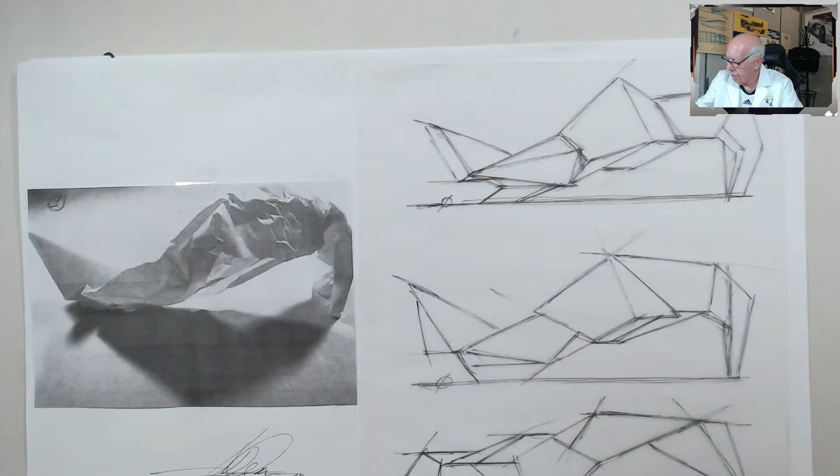So you can see it, Terrace, it was in that mode right there. That's how it sat. Okay, now let's put that aside for a moment and get these out of the way.

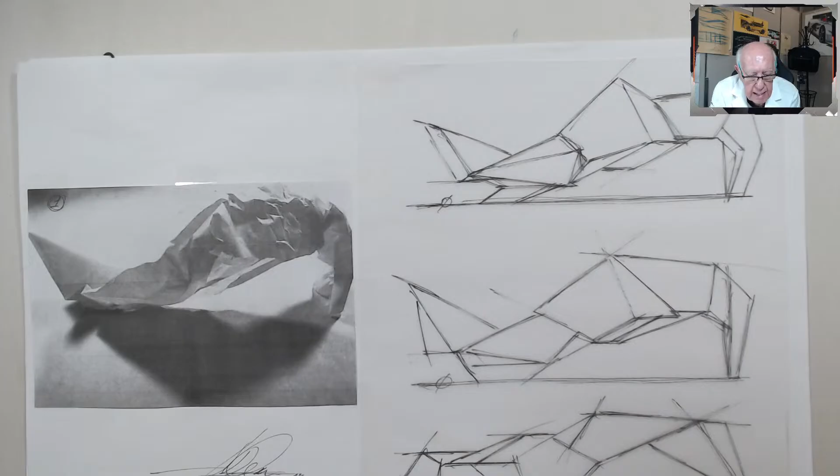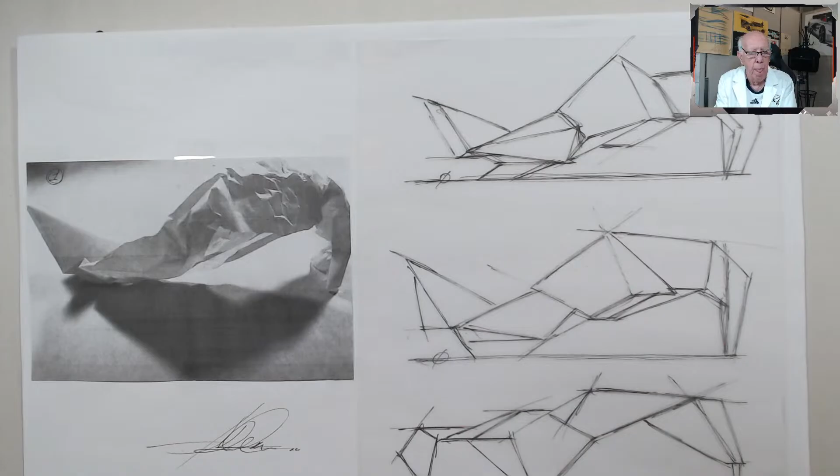Yes, it is, it's a whole different approach to it. Honestly, Terrace, the real direct answer is it's different because now it's more sculptural, it's in the third dimension now. You begin to see things that cause us to make decisions different than doing an empathy sketch. Empathy sketch is very much a flat approach, there's measure to it, but it doesn't have the same overall impact that a sculpture does. That third dimension gives you the idea of saying, oh, could it be? What if? And so forth. So it changes its character all the way through here.

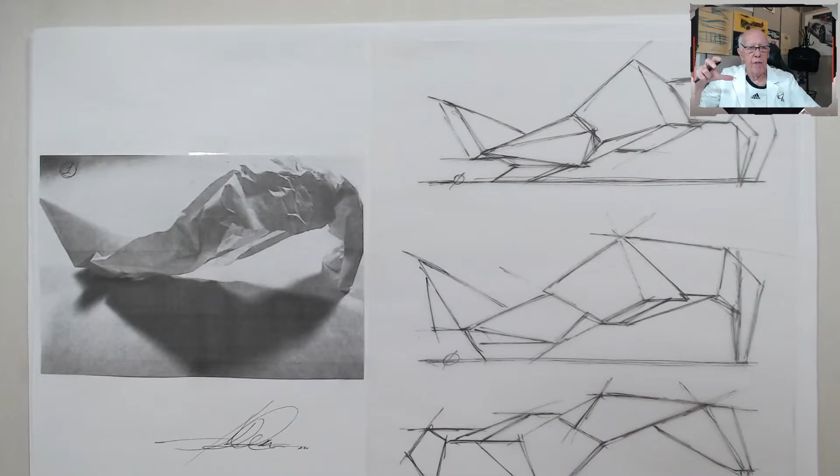So I hope that answers your question, is that a good way to answer it, hopefully? It does offer a much different approach because it's still abstract shapes, but it's in that third dimension that causes us to see surface instantly, and we can make decisions on that. So I'm going to stop for a moment. What do you think, does that help answer your question?

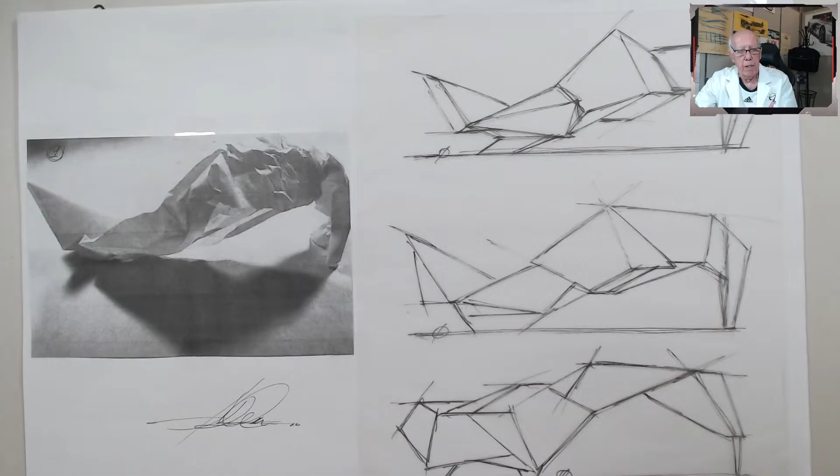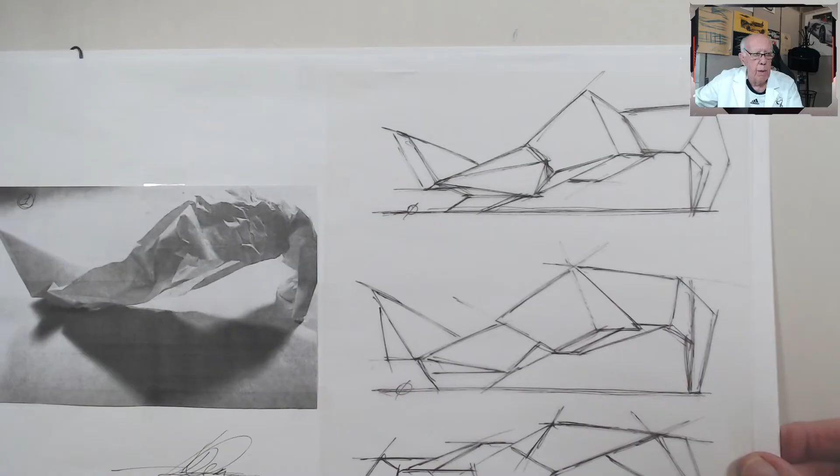Let me stop here and just make sure we don't go too quickly with this guy. Now I just took each one of these and went through it. For example, I photographed each one of these paper sculptures or empathy pieces that I did, and I'm going to attempt to describe to you exactly how this works. So there's the first one we just showed you, that's number one. What I did was break it down, and I want to be very careful not to just illusion you. This is a very sculptural piece, obviously.

Very round in some areas here. We notice that radius in here, and that strong pediment of that foot into a long promenade area here, breaking it down. But what I did was, in each one you'll see here, I broke them down into what the planes are doing. For example, what is this guy doing here? So these are very stealth-like or very sheer, but I'm not saying these are the end final product. I'm just breaking it down into shapes that I see inside this form.

For example, the foot. Could that be an entry area, into a promenade or a gallery area, and into another additional building here, or a footprint set? Maybe it floats. So those are the things I'm making certain of. Now, as we go through each one of these guys.

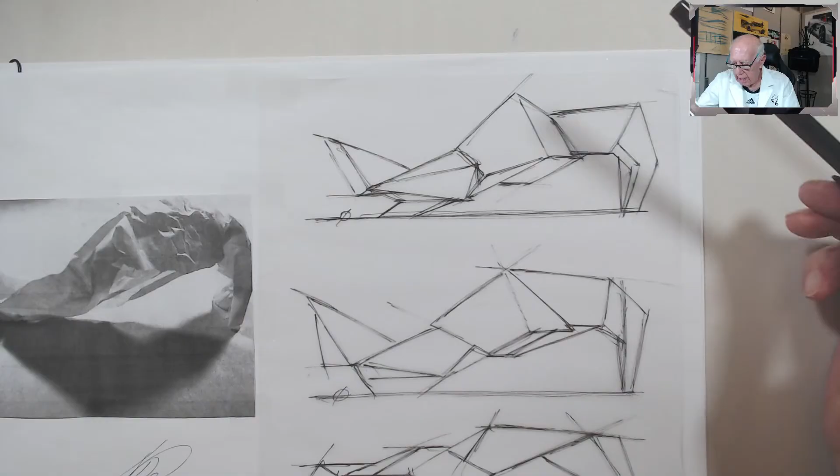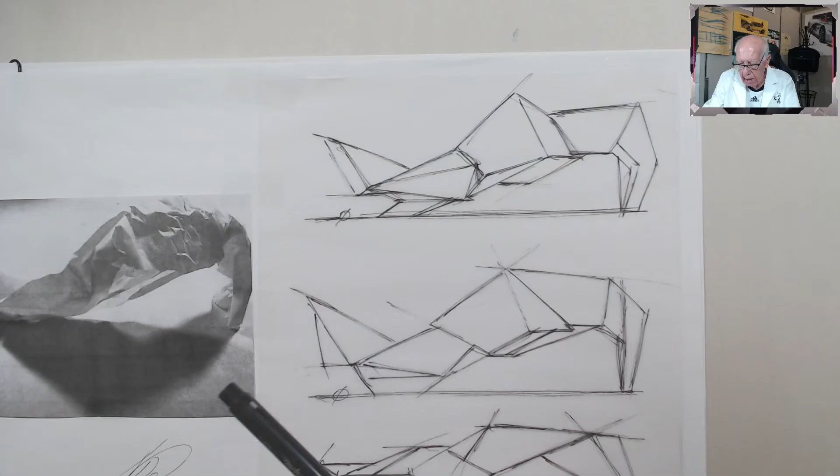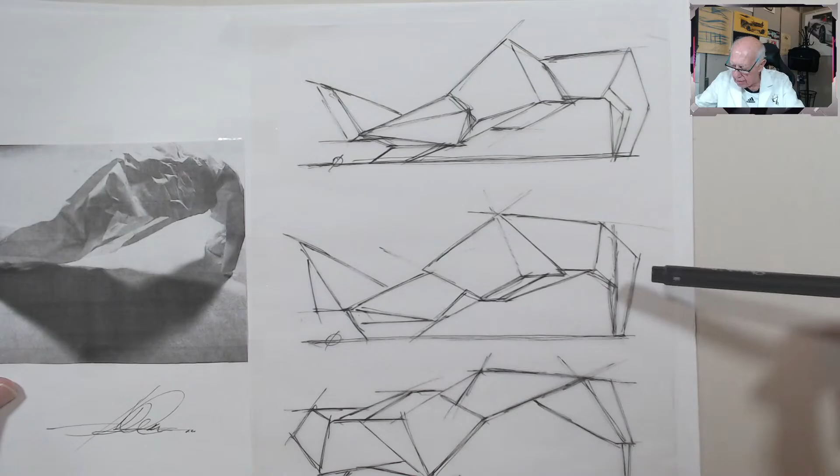Then the last one, I just inverted it, turned it around, flipped the thing upside down. Look at the circumstances that change here. All of a sudden, there's a lot of character in these things. And again, we'll be very careful to stress the fact that we're not looking at something that's stealth-like. This is nothing more than breaking the planes down for the benefit of beginning to massage them and change them as we go through the process from one to the other.

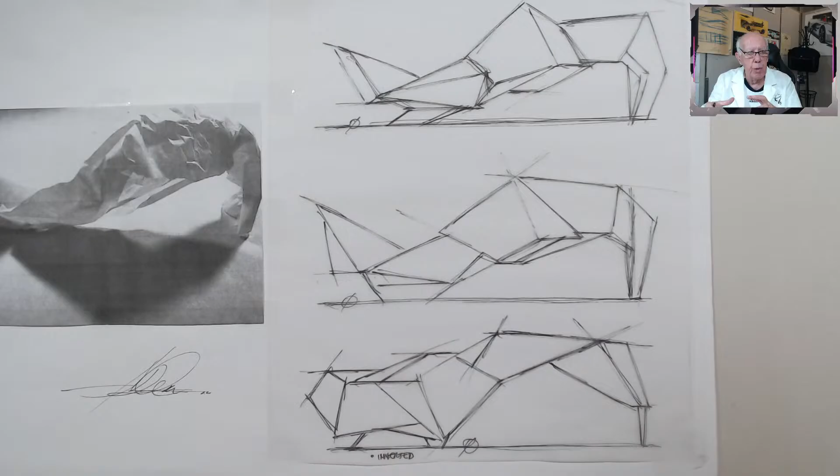So this is number one, a very interesting set of circumstances. And we'll show you later on today how we took some of these pieces and began to embellish and take advantage of that concept we're just talking about here. So this is number one. I'm running out of space here. Let's do this, I'll just stack these up. There's one. Now the second one I did was this one.

This is the same set of circumstances. I took a photograph. This is number two. Where was I here? Yeah, this is number two. There it is, and there it is in plan. Let me get this out of the way here. There it is in plan view, but there it is in side view. Notice how when you put that down in side view, there's a very large, very strong operation here in terms of that radius of that fillet into another floater behind it all.

So if you look at these sketches that I did in translation, there it is as I'd seen it. And this is what it looked like from a direct elevation. Notice this form right here is very strong. And again, this little cantilever over the top of that. Then this little appendage out front. So I condensed that by looking at this shape, that area there.

This portion right here became that portion right there. Then we dropped that in over the top of that shape, took this shelf right here and added that onto it, and then extended that portion out in here. And then putting a footprint on it, and again, it still had that same little shape in through here, a little shadow area.

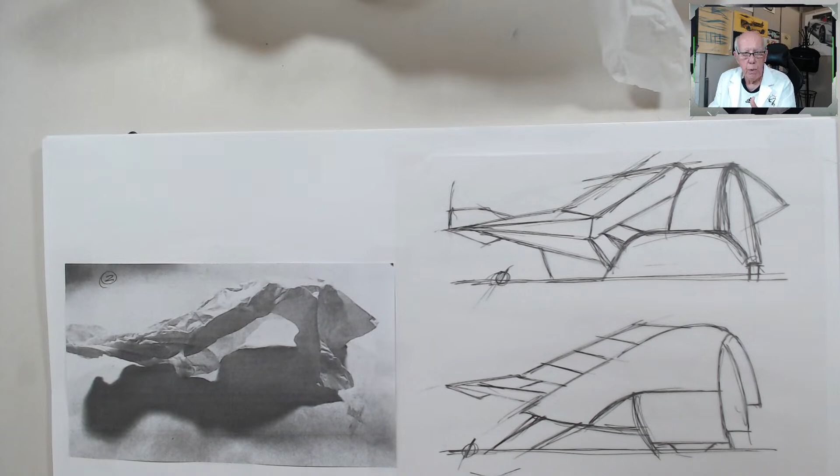So, next. Second one, look, I took advantage of this second sketch. There's that parabolic curve right there, and I brought that all together. This shape comes off of that form right there, right through that whole shape. Then we added this little plate down below here, which is this extra section through into here. That kind of eliminated that cover altogether. Didn't need that. Then I came back again with this whole tier up on top and put a little ladder to it, and then extended that tail out with a little piece of embellishment here.

The last one again was turning it upside down, where I took that same shape and flipped it and got the parabolic curve to go upside down and change some of the character. If I do it here upside down, all of a sudden everything changed dramatically. Just incredible how that whole thing put together. There's a lot of in and out on this stuff here, but this inversion gave me that whole portion upside down. It gave me this portion here, up, and then again, simplified the shapes and forms. Each one of these shapes, some are round, but most of it was very sheer, very stiff.

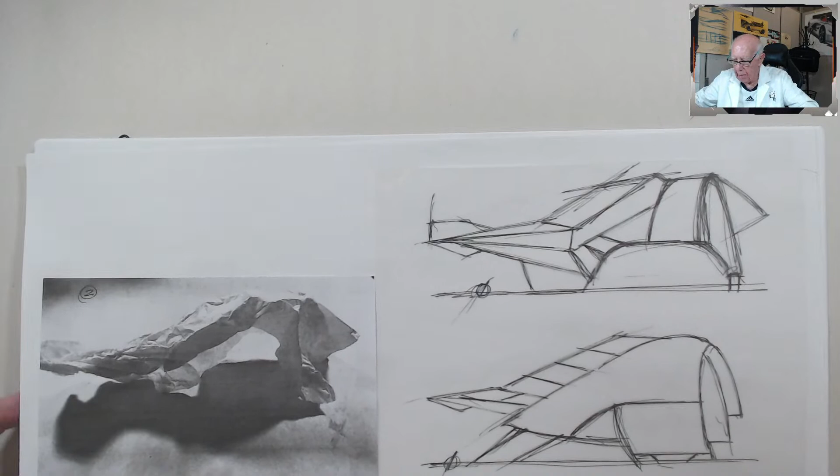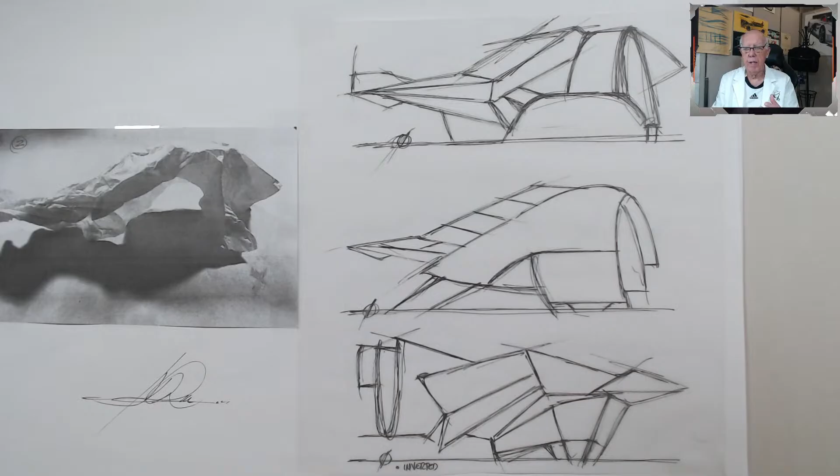But the idea behind it all is coming back in and saying, all right, now we can take that same set of circumstances, those basic themes, and begin to massage them and do a little bit more uniqueness with them. Maybe soften some things up. And hopefully by the end of the day today, we'll have a chance to have you all take a look at these sketches and say, okay, we kind of prefer this, or that. I'm not really going to make a selection in terms of my favorites. I'd rather have audience participation and say, this is interesting, these are pretty unique, this I would not do, that I would do.

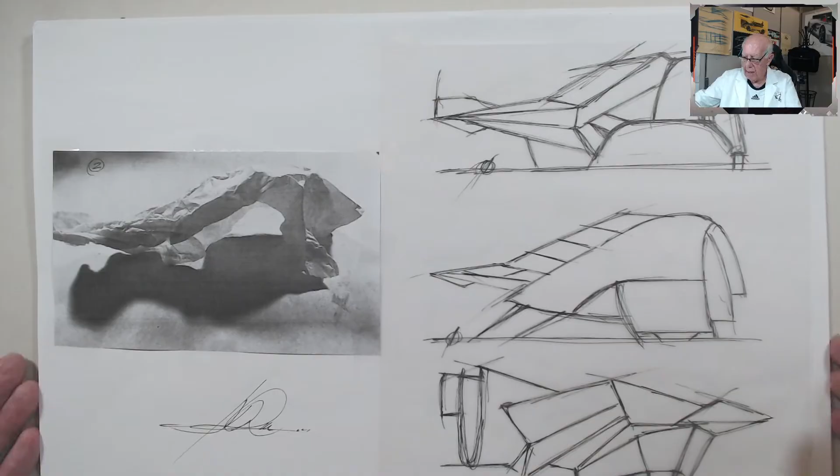The idea is to make this into a process where the next 3 or 4 sessions we take this thing and develop it further into a nice set of final architectural sketches, thumbnail sketches, and then some color studies and perspective. So that was element number 2. Let me get this out of the way and I'll move along quickly. Now the third one was this guy. And then the third piece was here.

Notice here it is in photograph. Look at the shapes that are generating here. You've got this form into that little curved form, and then into this whole barrier piece out front, and then again floating into a drop and into a shape. Notice now the sketches. That shape right there became part of that form there. Different way of looking at it, and coming out of that with this wedge or triangle out of that area. And that little extension down below, dropping it and putting that foot together with it. The original sculpture gives you the raw forms and you can interpret the surface character. Yeah, that's great. Well said.

By the way, am I explaining this stuff okay and not mystifying it or making it difficult to comprehend? The whole key to this first presentation in the project today is to take that abstract sculpture to the third dimension in architecture, break it down into shapes or faceted planes, and then slowly massage that into a series of development sketches that turn into, hopefully, a neat architectural study piece. So, does that make sense? Let me know if I'm making this clear. I don't want to confuse anybody. I want to keep it as simple as I possibly can, and it's an extremely direct approach to problem solving, and it opens up.

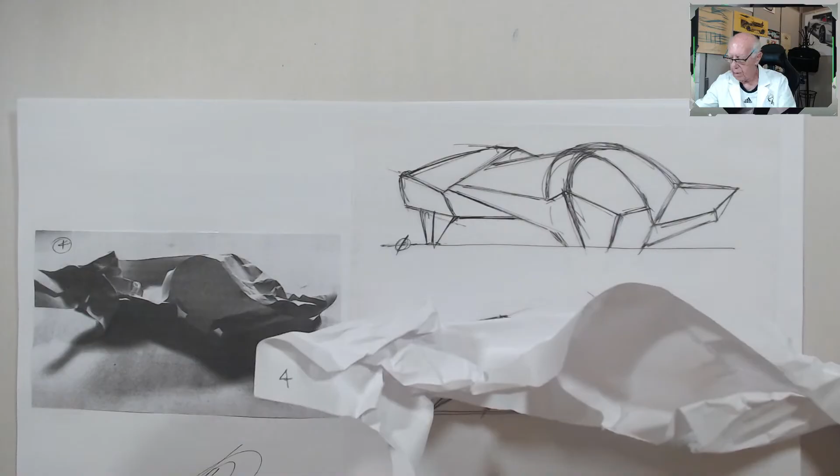Let me put this over the way here. That's element number 3. Let me get these out of the way. Put this over here. And now, this is number 4. Number 4 is this guy right here. Interesting how this one, all of a sudden, there it is in plan view. But again, look at the side view in this thing. And there's a photograph here. Look at that shape, that form right there becomes that form right there.

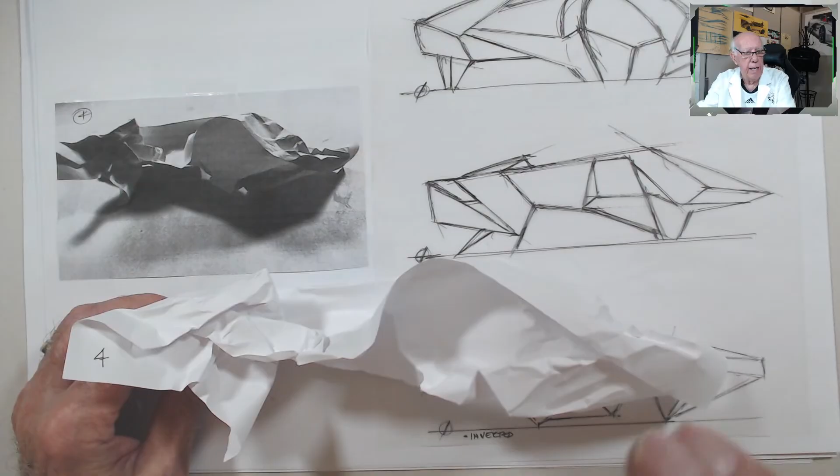Let me just move that over just a bit, then move this up and out of the way. There it is right there. So there's the elevation we're looking at in terms of what I did from that strike. This one, from there to there. And then again, taking advantage of that strike by going back in and saying, all right, let's do this. Here's number 1. Let's move this out of the way. Pardon me, thank you. Get these straightened up. There's number 1.

I'm not stating here by any means that all these are favorites. These are just interpretations. And my task now, working with you from week to week here, is to break it all down and find a series of selections that really begin to hum in terms of making a real good, strong statement here.

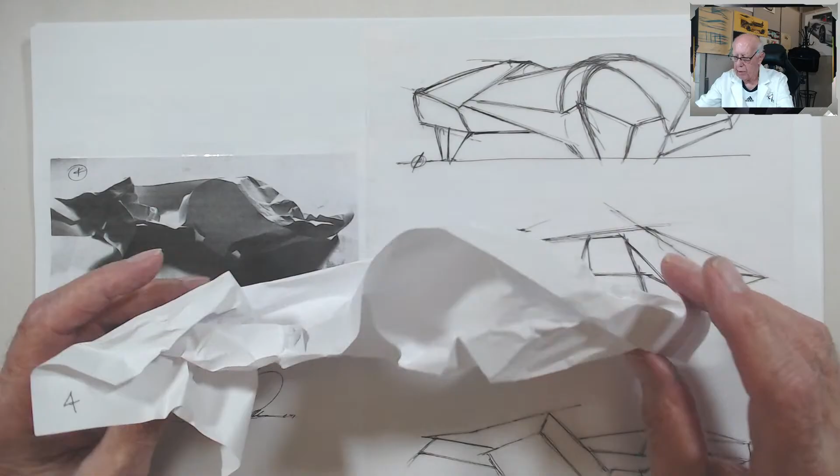When you inverted it, all of a sudden the whole thing changed. Instead of having this approach to it, for example, where we saw it like that, by turning it upside down and looking at it like that, all of a sudden things really change. Now I could go back in and, for example, look at this form here — let me put this out of the way here. This could go softer, but again, the idea of having these 2 modules connected with a sky bridge of some sort was, to me, pretty intriguing.

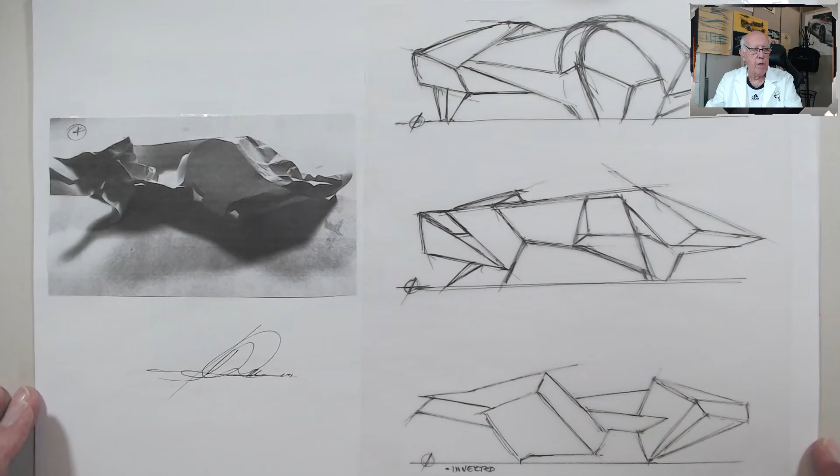So let me stop right there for a second, Antares. I really need your help. How are we doing here? Am I hopefully keeping this pretty compact in terms of understanding? Again, initial sculpture, translation. Not necessarily sheer, not necessarily all just stealth, but again, breaking it down into planes to begin to utilize as a sense of series to develop the shapes and surfaces in a final architectural piece.

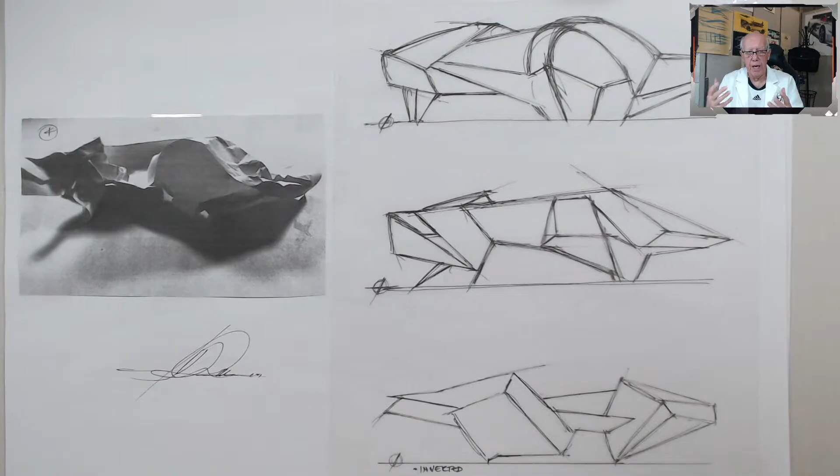Let me stop right here for a moment and just give you guys a break to kind of tune in and say, yeah, you're doing okay, or else shut up, or you're going too fast here. So I don't want to speed it up here, but again, very intriguing set of circumstances to work with. I've used it over the years. I'm always a big fan of it, especially in architecture. The Frank Gehry experience is one thing. The interesting thing is how it all comes together in terms of creating newness without us forcing it.

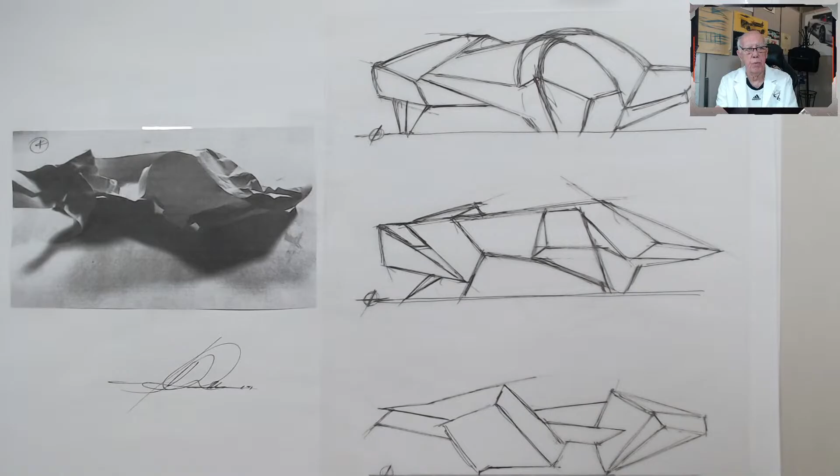How many of you, let me just stop for a moment here. How many of you, and I'm guilty of this, find yourselves doing the same thing over and over again? You've got favorite shapes, favorite forms, favorite views. That's all fine. But when it comes to developing a real target with your client base, it's always good to have a newness about yourself so they can't second guess you or predict where you're going to go. This tool, along with empathy and the flat dimensions with the content creator, are phenomenal. I mean, it just changes everything.

So I'm really intrigued by the fact that we're doing this project. And we're going to finalize some pretty cool stuff. When we're all said and done, maybe 3 or 4 weeks out, we'll go back and see the final piece and bring it back to the one we selected and the empathy architectural 3rd dimension. Really cool stuff. So here's number 4, and here's number 4 again. That was it, looking at all 3 variations.

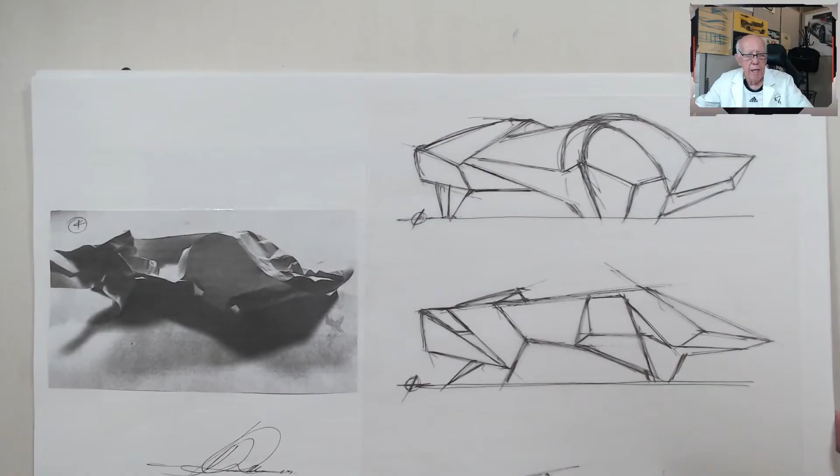Again, breaking shape down, that surface to that surface. And again, getting a little sheerer with it. It took that same form, and then just faceted it. And it's there, and there. There, and there. Just making changes to see things go here. So, yeah, that is pretty cool, isn't it, Antares? I mean, it takes a lot of the pressure off of us about trying to find something really different and unique. Let the paper do the work for us, and then make the decisions in that sculpture to make it become transferable. So there we go.

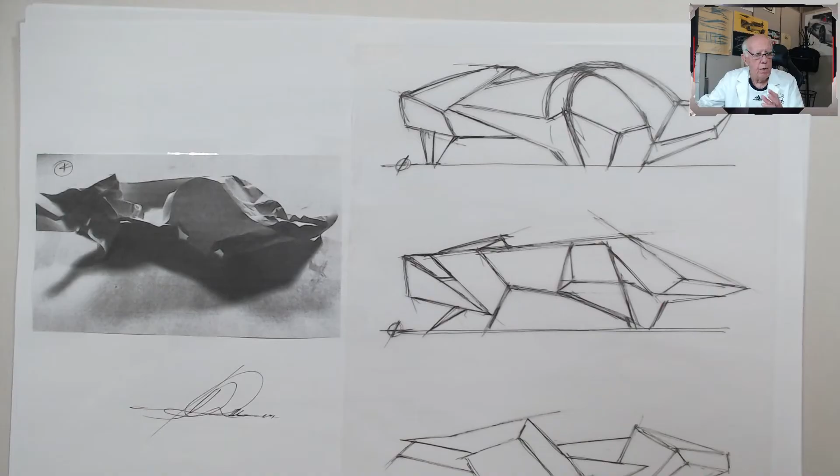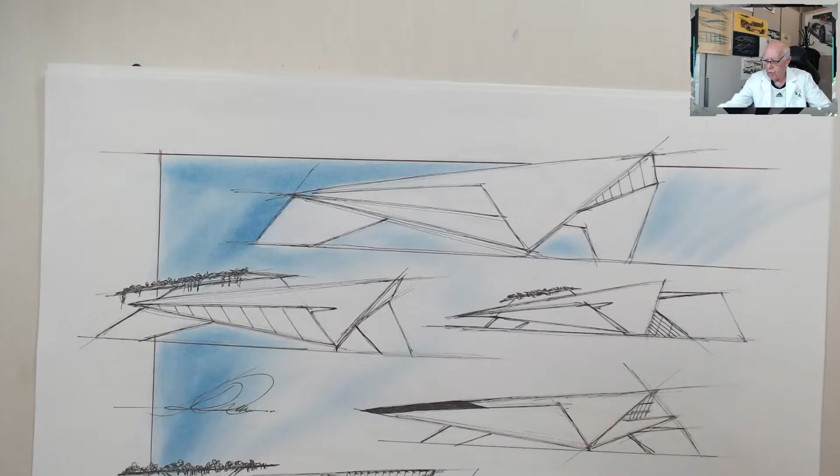I took a piece of sculpture of paper here, and then this is number 6. There it is in the plan view. Let me just lay that out here for a second. There it is in the plan view. But then when you turn it sideways, look what begins to happen here. Let's get this guy to kind of operate. There it is. When you look at it from the side view, look what this guy starts to do.

There it is. Let me bring it down in scale here. Look at that. Look at that elevation. In an elevation, we're looking at the very strong triangle up on top, this wedge on the side here, and this very vertical tail form over here. This addition. But again, I took this again just using paper, and in this case using folds.

And what I came up with was this. I mean, that's what it looked like. Now in the plan view, I didn't get to the plan view yet. I'm just looking at elevations. So there it is, for example. Let me get this out of the way here, and we'll just make sure there's some real estate to work

with here. So, based on that shot right there that we just looked at, this supposed elevation, that piece right there, I went ahead and said, okay, why don't I translate that into some sort of a third-dimensional piece, an architectural piece. So I'm going to throw a series of sketches. Here's what I refer to, studies on number 6. This is sculpture number 6.

Again, notice, very strong line here, and then what I did was this. I started here with this. Let me show you another again. Another elevation. This is where I started right here. Again, so I get this. That's it right there. So once I started here, there was number 1, so to speak, in terms of what that shape was doing. And so I took that form and said, all right, what if I did this?

Really not saying design at all. It's just letting the paper design it for me. Does that help to answer your question before I go any further here? Hopefully that's clarifying it for you a little bit. Good. So these are the sketches based on that number 6, where I just kind of flipped it around a little bit and did some really interesting things here.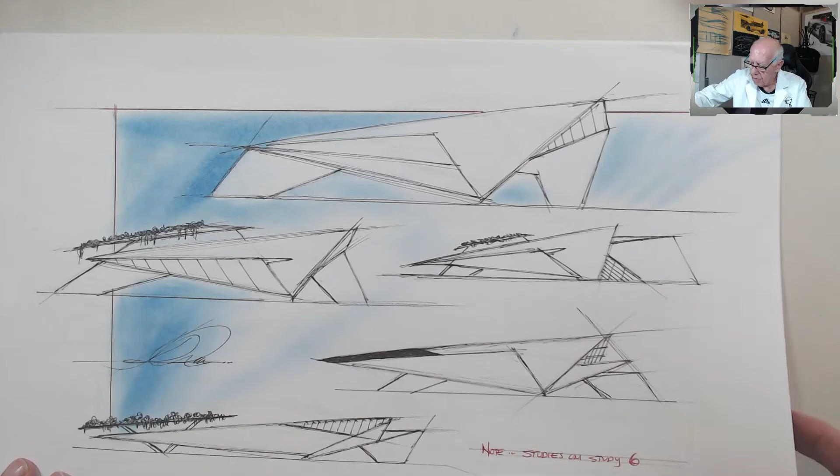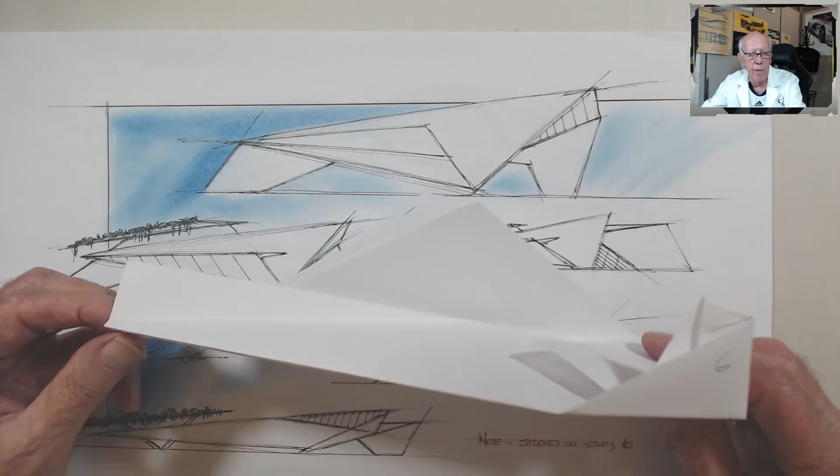So it started there with number 6, and that was interesting how, again, look, variation 1, same thing, long span, and then all of a sudden really kind of compressing the whole thing and stretching it a little bit, which gives you the fluidity to do so, which is all part of the process. Again, variations on number 6, and again, what we're looking at is that elevation right there is what we're dealing with. Again, there it is right there.

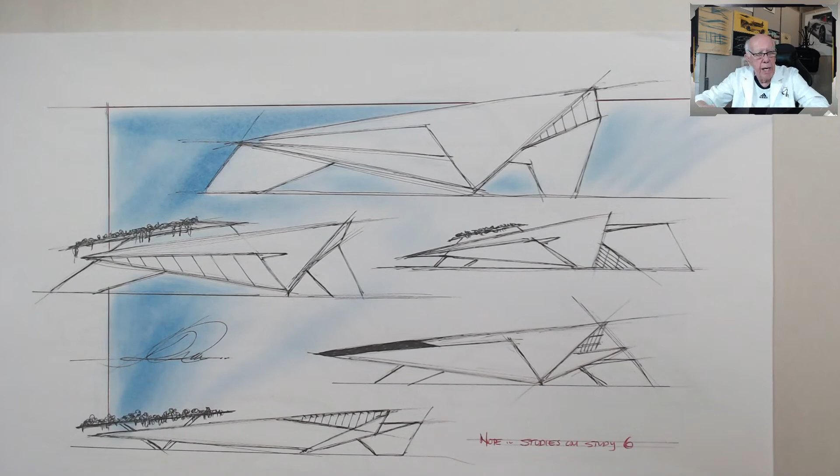And again, the other approach up on top, this first sketch here, was again looking at it from that point of view, where you've got this very long straight line coming up, and again, that wing right there is this portion right here. So again, notice the idea there is you start in one direction and you can flip it upside down or maneuver it in such a fashion. In fact, there are some things here, when you look at it from that point of view, look at this.

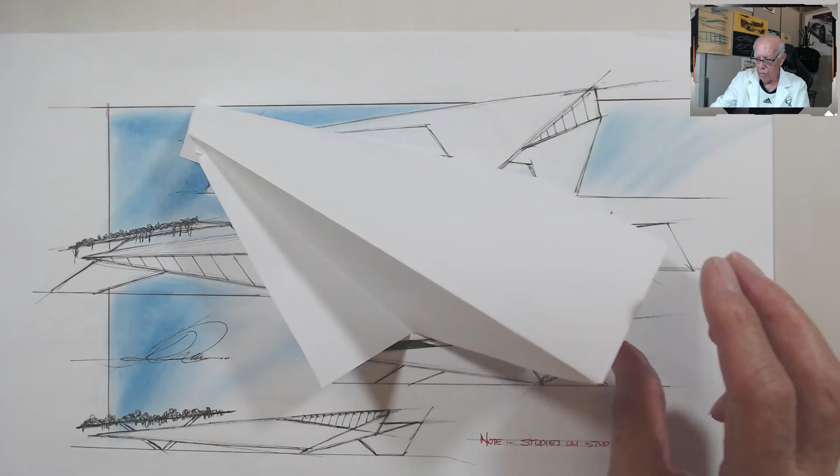Look, if you look at that and get that down on ground line, look at those shapes, how they begin to move dramatically here and just open up things. When you set that up, it's a whole different set of circumstances. Really intriguing process to work with. And I think that's part of the intrigue and the fun for me, is it opens things up in terms of being extremely lucid, helpful, and without question, just really unique stuff here. So there's a family of forms here on variation number 6.

And I'm not going to go any further here. That's 6. And I moved on here. Now, I'm going back to, after the final 6 pieces are done, I don't know if I showed you number 5 yet. It might be coming up a little bit here.

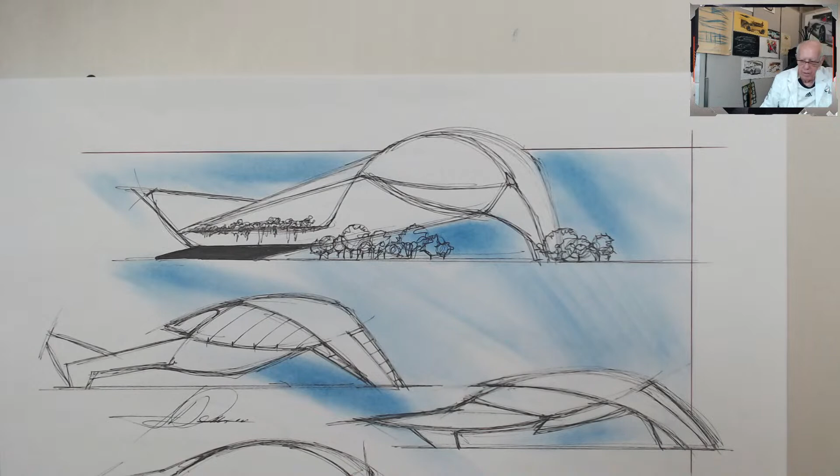So if that's it, there's number 6 variations. I went back to number 1, which was this guy right here, the first study we did. I went back to that guy and began to look at it from the point of view of, what if I take some sketches here?

I went back to number 1 and began to refine this form. It actually stood up like so. There it is in the plan view, and there it was in the elevation, so to speak. And then these sketches were coming about as a result of that piece.

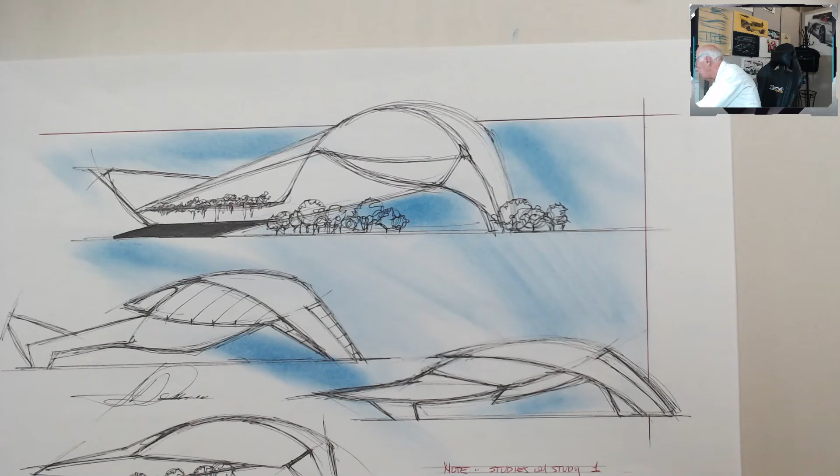When I go back to this in just a moment, we'll move around here. When I go back to number 1, there it is, in terms of where we started. Very sheer, very organic. But again, going back to maybe facelifting this thing, maybe we take this shape.

Let's bring this up here for a moment. When we take this shape and begin to develop a very round form in here that kind of opens that up a little bit, take advantage of being a little bit more of a stretch to make this thing function properly for us.

So let's get that out of the way for just a moment. Notice what I've done here. Again, it's kept the footprint, but it really took that whole shape, that whole nose cone so to speak, opened that up and just brought that form right up and into a very large curvilinear shape, which is reflected right here. So it's this into this into this. Whole different approach to it.

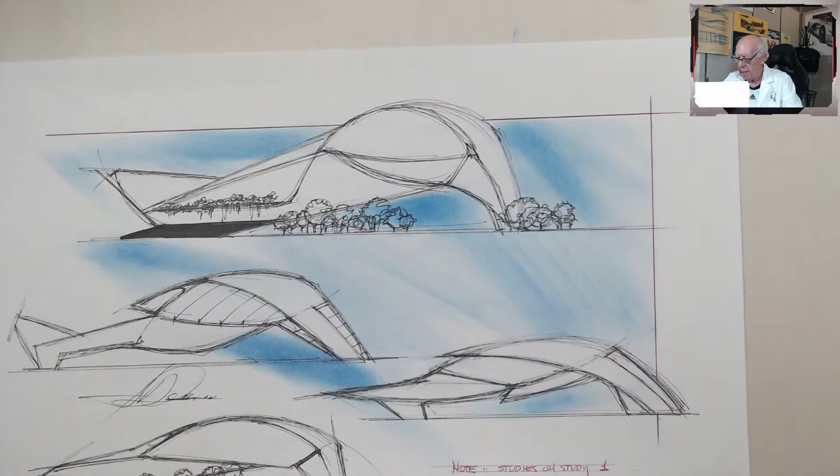So looking at how we got the shear surface to work, now blending them and massaging them from these passes, just to look at them very briefly. Let me put these back in order so I can get them out of line. And here, this is sketch number one.

Now number two, maybe taking that shape and just stretching it a little bit more, pulling it over and getting this glass prominent to come out of this shape, then pushing underneath that envelope and getting this to function nicely, then coming out of it in a nice little prop. Maybe that's just enough of it here to end it. So that was the second variation, which I thought was a lot smoother looking, a lot more aerodynamic and more architecturally solid.

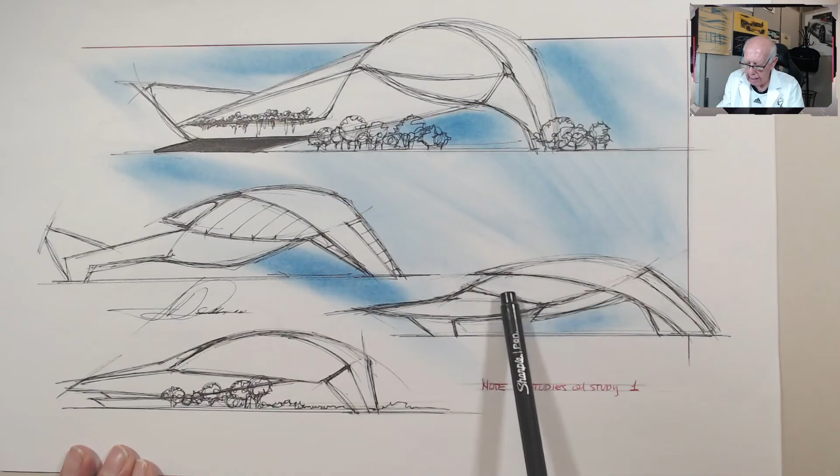Third phase, taking advantage of this shape and really getting a very, very low profile with it. Again, same shape underneath. This becomes an aperture, maybe that's all glass or transparent. A support piece underneath might be a walkway, then a terrace area up behind that shape, and then planting it.

Again, really intriguing to me how you take that sheer start where we're with number one, the first paper sculpture, and begin to look at it again and see certain things in it that you didn't see the first time around.

Now, let me stop right there. And terrace, truth be spoken, is this making sense? Helping?

It's developmental. It's transferable. Because you start with a paper sculpture, it does not necessarily mean that you're doing the same thing or have to follow that verbatim. That gave you the start. Then you look into it and begin to analyze it for what it's worth, and begin to really develop a lot of really interesting stuff in terms of putting together the geometry that you need to see, to aspire to what the truth is saying here.

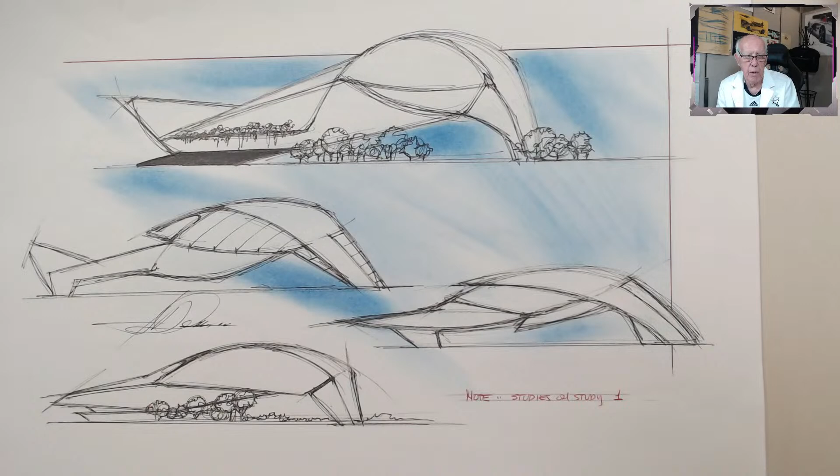So I'm going to stop over for a moment and we'll see what you think. I like that bottom nose sketch of the nose cone. Yeah, I think this one has a lot of, I agree. This one has a lot of emphasis to it.

Again, notice this nose cone piece, that could be a nice, maybe that's a solid piece. This would be all transparent, back to a promenade area and an entryway piece in behind here to come into the actual structure. By the way, I'm really not having designated what this structure is going to be yet. To me, it might suit itself to being a very large displayer or a museum area or an exhibit hall of some sort. So we'll make that decision as we go here.

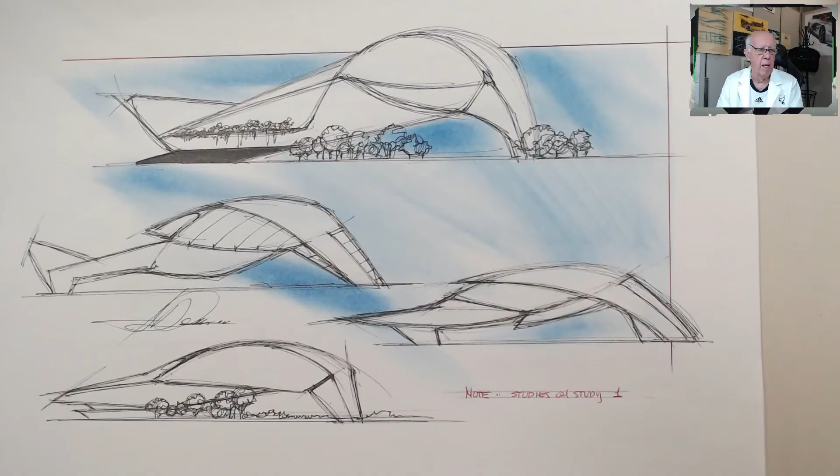It's always good to get a good start on this, because next week we'll move in and refine a little bit further, and we'll take it from there. So I'll hold on a moment while you make that decision.

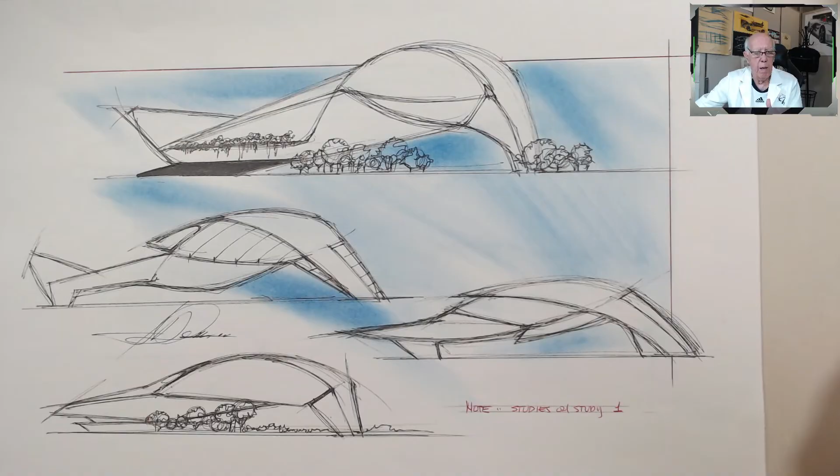It really begins to look at what happens, for example, when you get around people like Frank Gehry and how his process worked. I've never forgotten that experience, and I've used it over the years—it's magical how it functions and works.

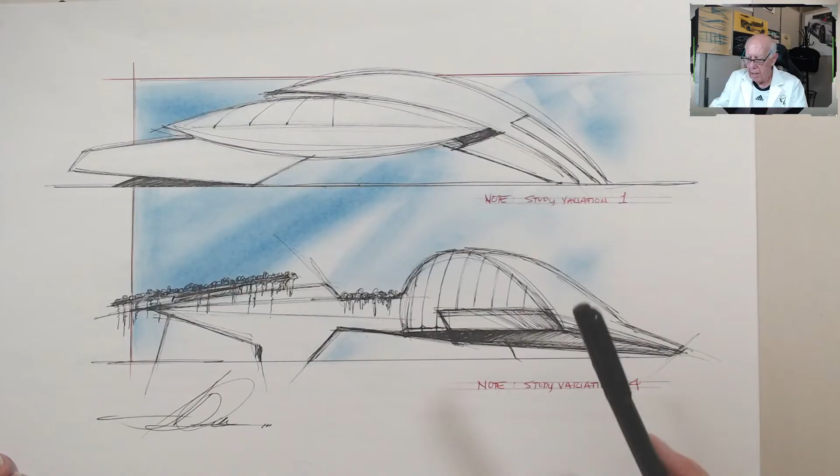Hey, thanks very much, Terrace. Moving along here, there was another variation on studies. There's another one, study number one. Look at this guy—that helps just to stretch it even further.

It goes back to what you said about this guy, Terrace. That might have been a favorite, but I took that advantage and went a little quicker with this thing, taking that into account—and there she is right there. All of a sudden, I stretched that beauty and got a lot more fullness in this form.

This piece underneath, kind of snuggling underneath the shape, doing some really interesting things with the forms, and just looking at elevations to get something down in terms of what the direction is going to become.

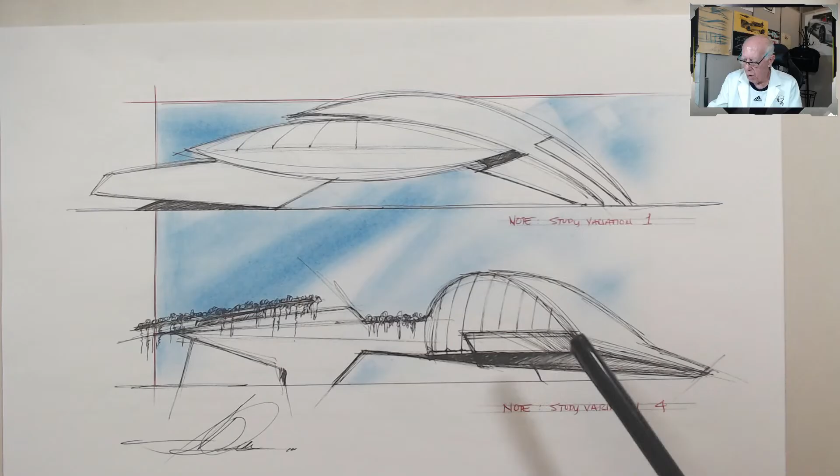This one was back to number 4. Let me find that shape here for a second. Number 2, 3—I think this was 4. Nope, 3. Let me find number 4, and we'll get this up here on the board.

Number 4—this goes back to shape number 4, for example. The one down below, let me do this. This sketch down below was a variation on number 4.

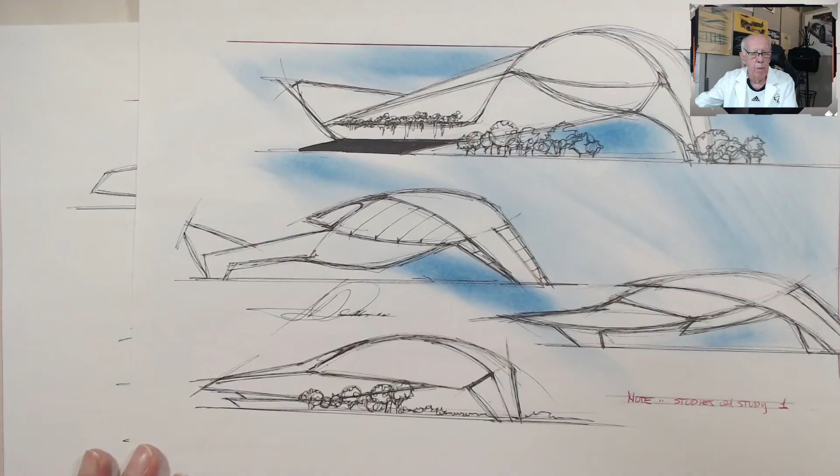I'll go back to this for a moment. From where we were with the one you just looked at, Terrace, this guy had some character to it, but it still looked a little clumsy in here—adding the pieces on, trying to make more out of it than I have to. But going back to this, being very simplistic about it, it's 1 to 2 to 3, and it just seemed to stabilize the whole unit here.

A lot of this can be really intriguing in terms of what might be fun with this guy—to take this shape and massage it a little further, go into plan view studies and maybe sections, and see what that thing looks like. That's the idea behind number 4.

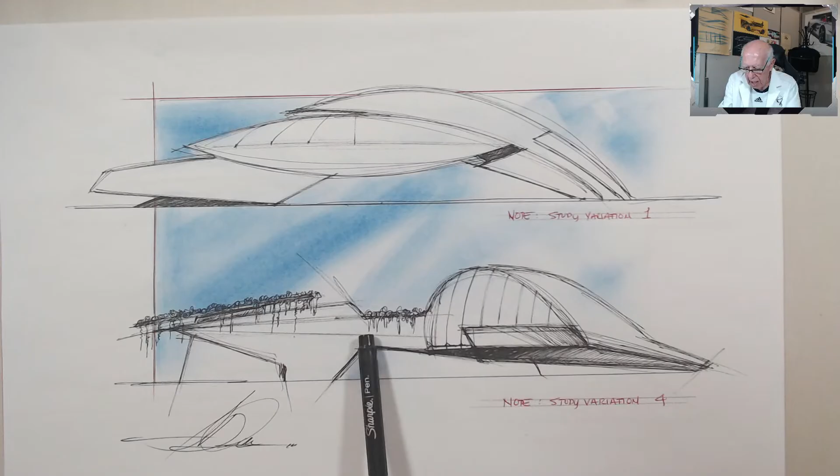Do you think this was interesting? It's got a different approach to it, but I think you'll see some changes down the line here. It'll look a little odd in through here, and I like the idea of the sky bridge separating the shapes. Let's go back to this for a moment.

This is number 4 here. If you look at this shape—if I can get these on the same page here—no, not quite. Anyway, if you look at the shape, number 4 had this form to it, coming in with this big parabolic curve, then a big long platform and a little connector here.

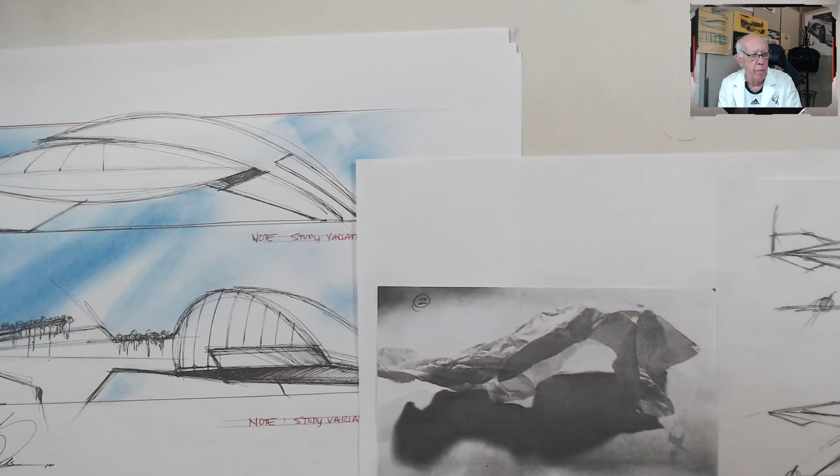That's revising what you see here in the paper, and then taking advantage of being a little more forthright with it, making some decisions that are very critical. So let's put that aside here for a moment, put this in, all this together, and keep these in organized fashion here.

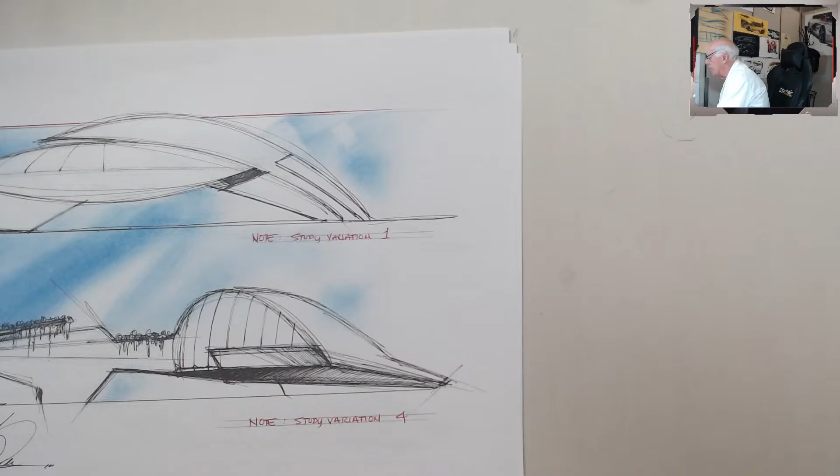So again, this is a variation on number 1 and a variation on number 4. Once I got those down, I think this one has some real character to it, based on where we were from number 1, taking the evolution down the line here—not to be redundant, but just taking the time to look at these one more time.

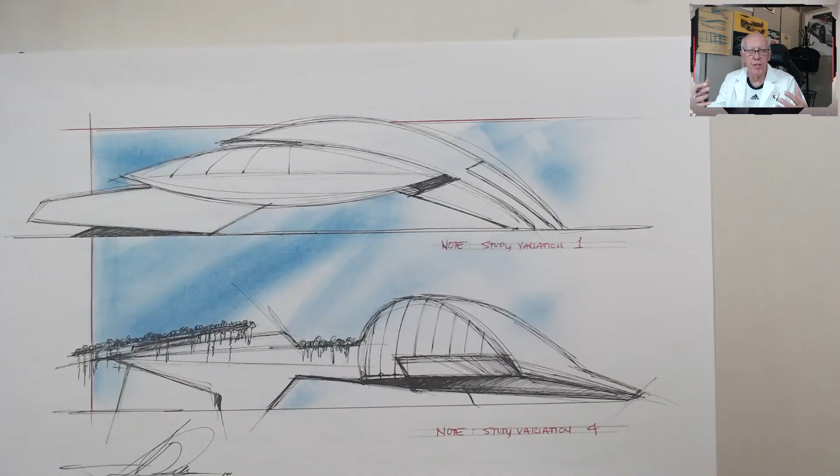Even though they're sheer in the first pass I showed you, the first 4 plates, very geometric and very faceted. Now taking those facets and combining them into maybe soft and sharp. That's the beauty of being creative with it, the beauty of this whole dimension of architecture in the 3rd dimension. It gives us flexibility, allowing us to see it a 2nd, 3rd, and 4th time and really tune in on it.

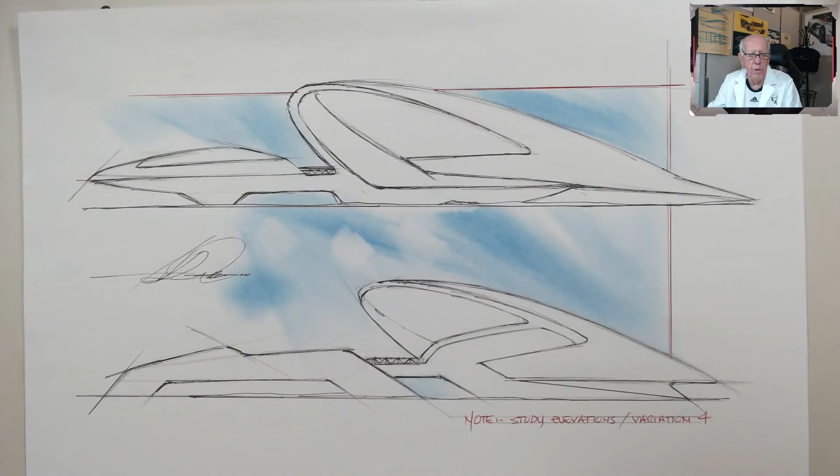So there we are, that's the plate here. Now let's go back to the next pass. What do you think? These are variations, I think we're just about there. These are variations on number 4. All of a sudden, everything changed, it just really got a lot more fluid in terms of where we were. This is not a bad start.

Let me just stack these up a little bit. Number 4 here was not a bad start, but I wasn't really sold on the busyness going on in here. I wanted to take that shape and really combine it to make it more dramatic. So that goes there.

And now look at this, there's number 4. I'm changing that whole area, that whole shape, really stretching it and pushing it up underneath. Maybe there's a bar here, and this is more of a plateau or a sharpness that goes inside the form. This cantilever comes out and can provide maybe a walkway or an observation panel of some sort.

And then the last one, for example, going a lot more fresh with it, just cleaning up the shape on top here. Again stretching that, and now notice this indication tells me this whole thing is flush, or recessed, or flush. This could be a really bold process in terms of developing a lot of glass forms into a cantilever. This could be opened up again, and this whole idea could be like a garden of some sort, and the entryway maybe an exhibit hall in here of some sort, whatever it ends up being.

Futuristic, what do you think? Futuristic in a sense, positive or negative, Terrace? Hopefully one way or the other. I can certainly understand both futuristic points of view. Is it positive in a sense, futuristic, or is it a little too much? Because some of the things we're looking at from an architectural point of view now are really intriguing.

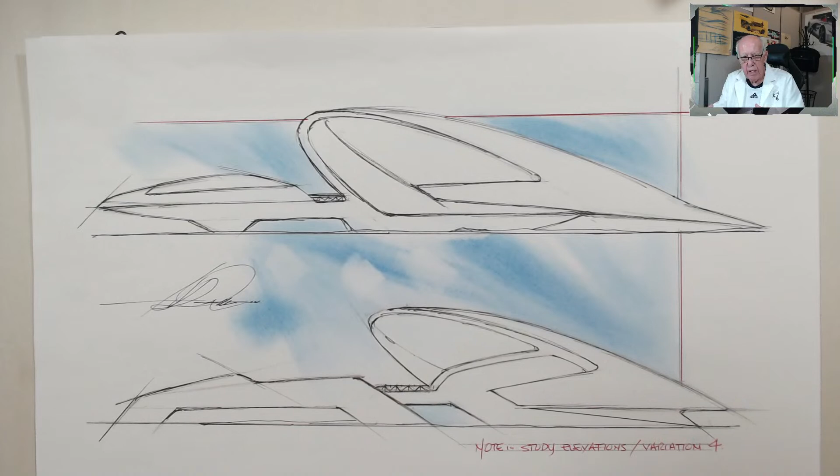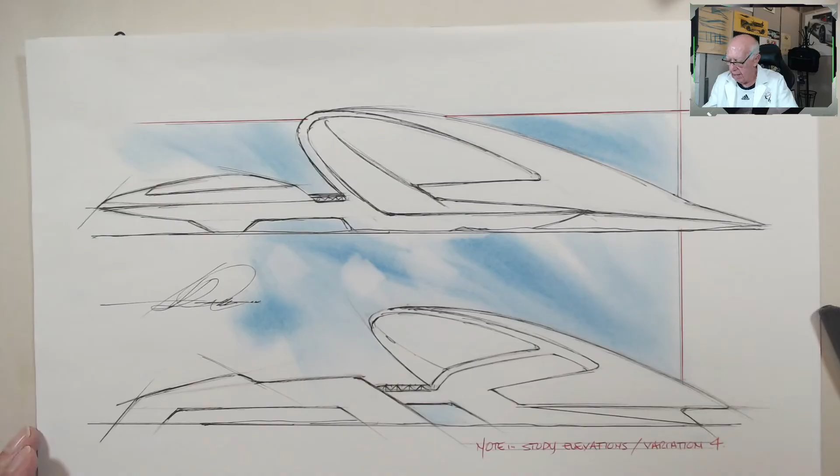So I'll wait here for your decision. What do you think, coming together all right? And again, what's deceptive here in the elevation is that it could be a lot more fluid in terms of roundness and shape, and then back to counterpoint. All those things we can take care of as we go down the line of this program, from one level to another, from one stage to another. So, if you don't mind, what do you think in terms of futuristic, plus or minus? Good futuristic or not futuristic?

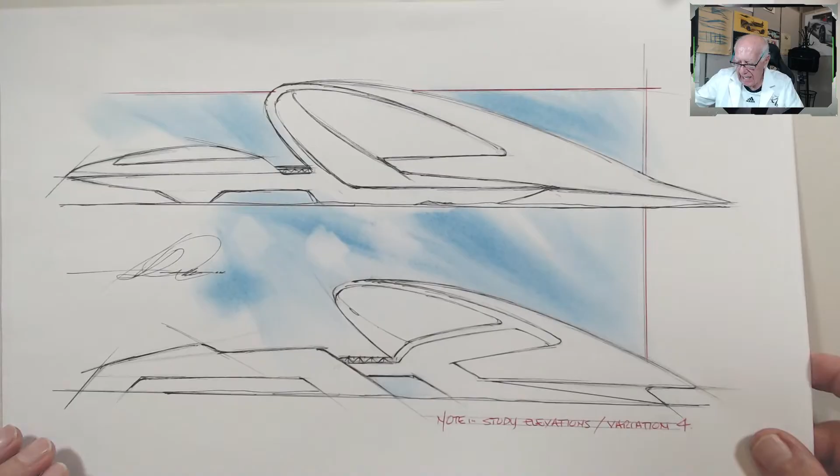Sci-fi, that's a tremendous description, very scientific. There's a lot of architectural examples out there around the globe today that are extremely futuristic and almost very sci-fi-like. Some architects do things that are absolutely amazing, straight out of a science fiction novel or film. So let me ask you a direct question: do you think this is a merit to pursue, if possible? Because it is out of the box, and that's what we're looking at here. That's why this empathy stuff is so powerful. It takes you away from the normal into the abstract, and forces you to begin making really solid decisions.

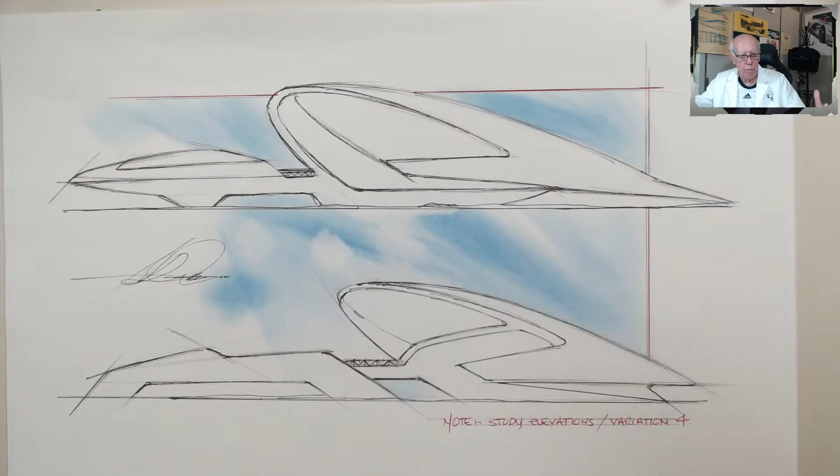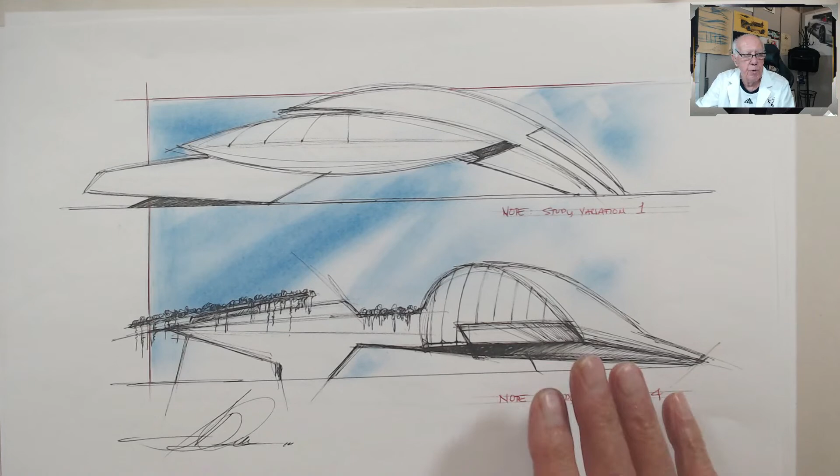So what do you think, Terrace? Is it worthwhile? Not necessarily positive. That's good, we'll have to see how it comes out, huh? So let me go back to this. You're more in favor of something like this nature here, right? That was one you kind of selected as being interesting. Could be interesting in a sense too. This could be fun.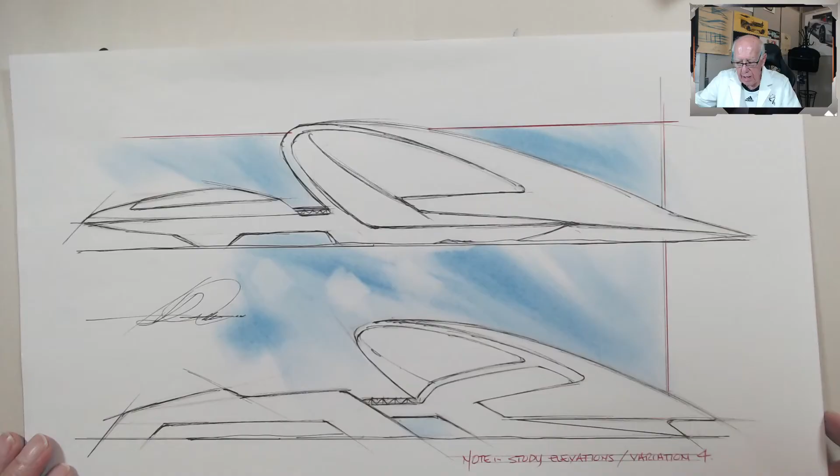I can look at both areas here and begin to make some decisions. And while I'm at it too, going through the entire process here, there's nothing here set in stone. These are just first blush passes of how this whole thing... oh, that's okay, that's fine. Good to know in terms of where you want to go with it. It's a very, very abstract piece of information here.

And I think it's worthwhile taking a look at it. It'd be a little bit of a stretch, and if it's yay, great. If it's nay, then terrific. I appreciate the insight above all else, Antares. But going back to the overall view of today's presentation, that's true of all of these studies, by the way, too, Antares. Each one of these are strictly in elevation.

Now, throughout the whole process, we can go back and look at all 6 we first started with, and then the variations on theme, and begin to move those into some real quick thumbnail perspective sketches that might change the character of this thing even more so. So that's the plan through the next few weeks: taking these elevations, looking at them again, refining the goods and bads, getting them down to some simple statements, and then generating thumbnail sketches of what they look like in perspective, like overheads or plan views, and those kinds of things.

And I can't stress enough that the whole intent for today was to introduce the third dimension of architecture using paper sculpture. It was just a process of thinking. Now that we've got the process down, we can start to modify the process and make adjustments that are much more applicable to some really good, solid architectural sketch work. So does that make sense to you? Hopefully? Good? If you change your mind on the plan views or some of the other views, that's great. If not, we're still going to go full statement, because I respect your insight, Antares. Really respect your insight.

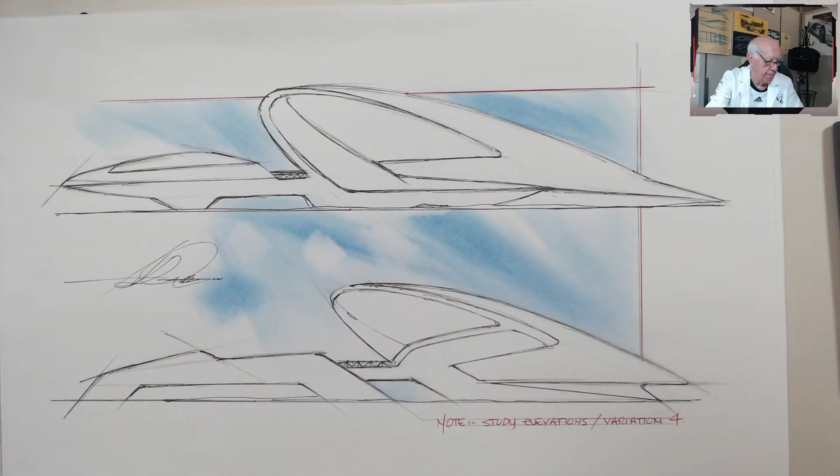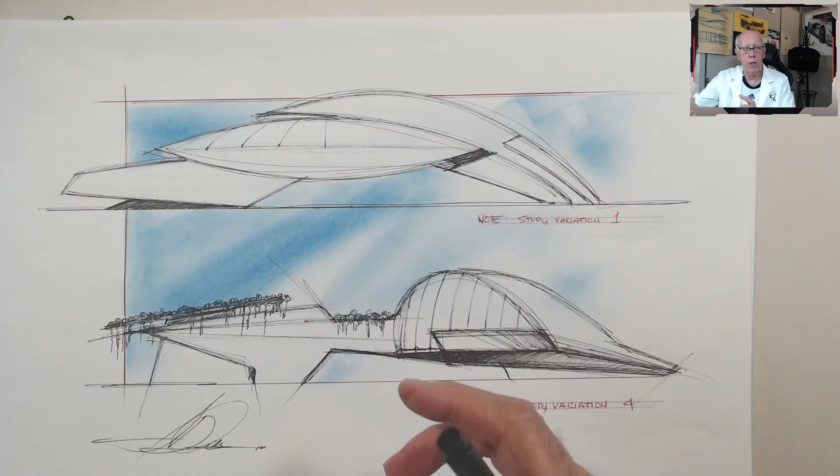So let me get these out of the way, and I'll wait for some conversation here to wrap it all up, and we'll see what we've got for next week. There it is. I still think this guy is intriguing. There's something about this one right here. It's not a favorite, but it has some potential. Something about this guy right here for number 1 makes a huge amount of sense. Now, it's radically different from the paper sculpture. But again, isn't that part of the cause? To take that paper sculpture, analyze it, refine it, and then settle it. So that's what we're looking at here.

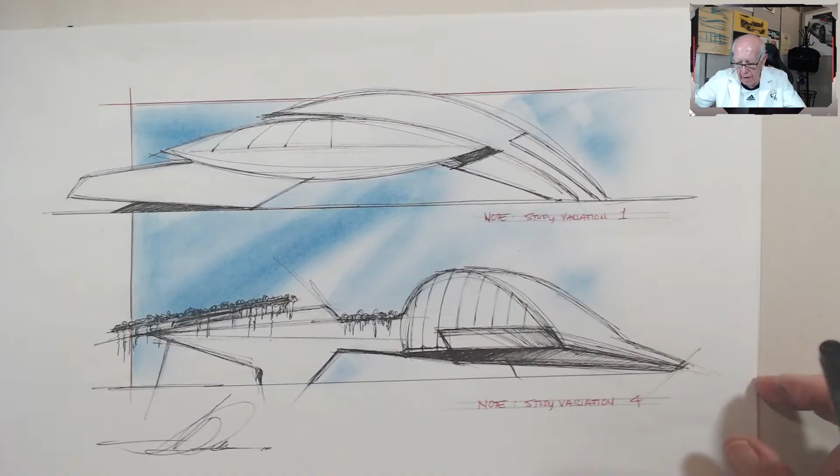And again, this will change again. This might change too. I might take a look at this again. Maybe. Oh, that could be. I'm gonna go back and look at this one more time for next week. All of them, we'll take a look at them. Just some of the ones I thought were really interesting. Interesting stuff I'd put together. I think this will hopefully be a benefit to you.

Because your talent level and your skill set is amazingly strong. And every time you open up a new box of thinking processes, hopefully you take that and tailor it to what you do in your design story from day to day. And going back to something you mentioned some weeks ago, I was really pleased to hear that your manager called you aside and said, hey, you're doing some great work. I think that's very exciting, Antares. So congratulations to you. And we want to keep that moving as you advance in your career here. So really neat stuff, guys.

So in closing, Antares, any overall comments about what you saw here today? My desire is for this to be a real cornerstone of thinking experiences and problem solving that is outside the box, yet we bring it back in and make something completely unique when it's all said and done. Much like the product design piece we did. Oh, by the way, we're still waiting for some input. They've made some decisions on the product design we worked on, and we'll bring some feedback on that once we get the news.

So anybody, what do you think, Antares? It's closing it up for us here. Nice job. This is fun. It's a different way, a different exercise, but a very vital exercise.

And again, like I said at the beginning of the stream, it does two things for us. It opens up the window of opportunity. It refines our vocabulary. It expands it. There's nothing greater than that, because then again, you can't be predicted. Every time you do something for a client, it's a new approach, a different set of circumstances. So they cannot predict what you're all about.